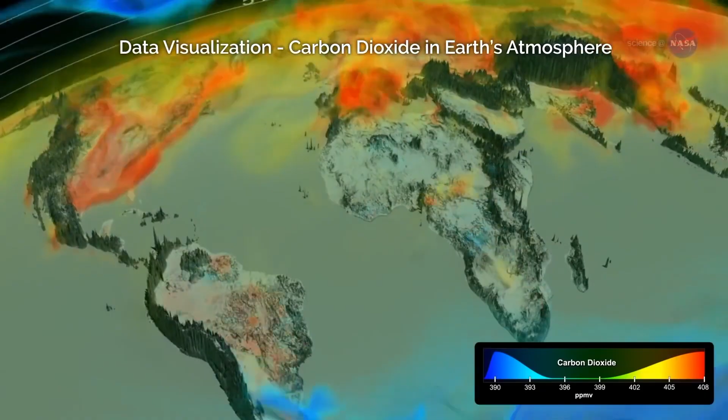We all know that the accumulation of CO2 is endangering our planet. For instance, we have recently reached the threshold of 400 ppm, entering the danger area, and if we do not act now, there will be catastrophic consequences.

But let's start with some facts about combustion, to show you the importance that combustion has. For instance, 2/3 of the world energy supply is based on combustion. So if you take a typical day in your life, that would have a certain energy footprint, most likely based on combustion. But on the other side, combustion is responsible for air pollution with NOx, SOx, soot, and CO2 emissions. So the first reflection would be we have to get rid of combustion, but that is not so easy.

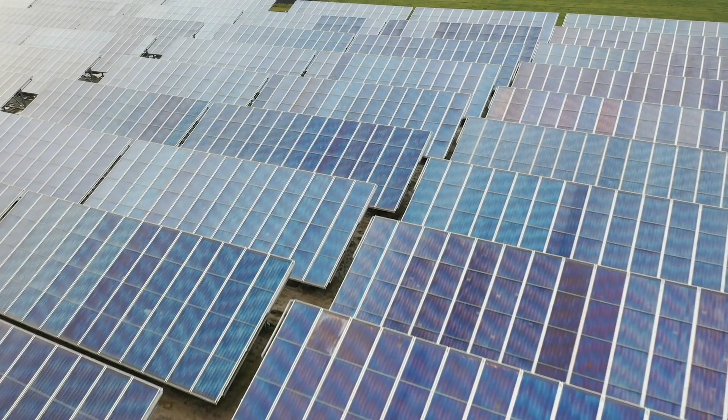Let's understand why together. The main issue related with renewable energies, solar and wind, is the low energy density and the intermittency, both in space because they are not evenly distributed in the world and in time because their input changes. So there will be a mismatch between energy production and consumption at different scales, day, month, year. So in a hypothetical world based on 100% renewables, we will need to store a gigantic quantity of energy.

But how to reach this storage level? Batteries cannot reach this high storage capacity. Therefore, we will need something else, something for seasonal storage with low pollutant emission and zero CO2 emissions. Chemical storage or power to fuel is a potential candidate. Indeed, it foresees the use of excess energy from renewables to produce energy carriers in the form of synthetic fuels.

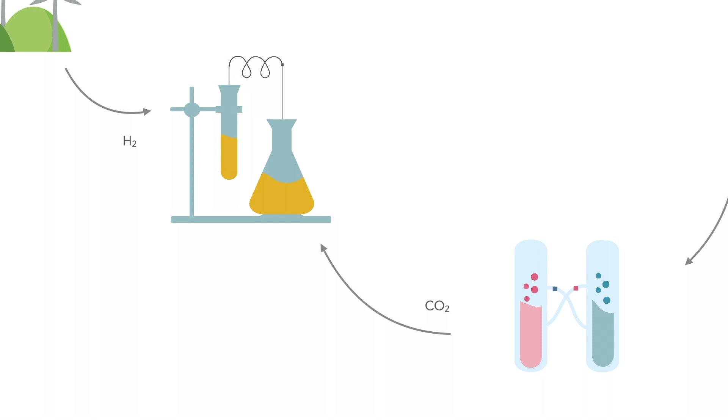We start from the electrolysis of water, we produce hydrogen, and then adding other molecules into the loop, for instance CO2 from carbon capture, we can produce methane, or nitrogen, and then we can produce ammonia. In this way, we transform the intermittency of renewables into an opportunity. Ammonia has a great advantage compared to hydrogen because it's liquid if compressed at 9 bar. So we can solve the transportation problem of hydrogen.

There are recent studies foreseeing the usage of ammonia for marine transportation, or hydrogen can also be plugged into the natural gas pipeline and can be used in a blend with natural gas. However, something very important that has to be considered is that even if hydrogen and ammonia are carbon-free, so no CO2 emissions, they still produce NOx, which are very dangerous for human health and can produce acid rains, so that should be avoided.

The main idea behind my project is that combustion is not the problem, because we still need it, but we need to develop combustion technologies which are fuel flexible to handle these new smart energy carriers, with low pollutant emission and high efficiency. Flameless combustion might achieve these goals.

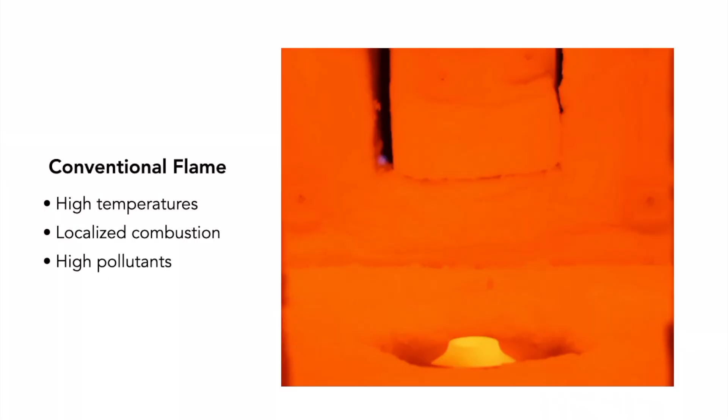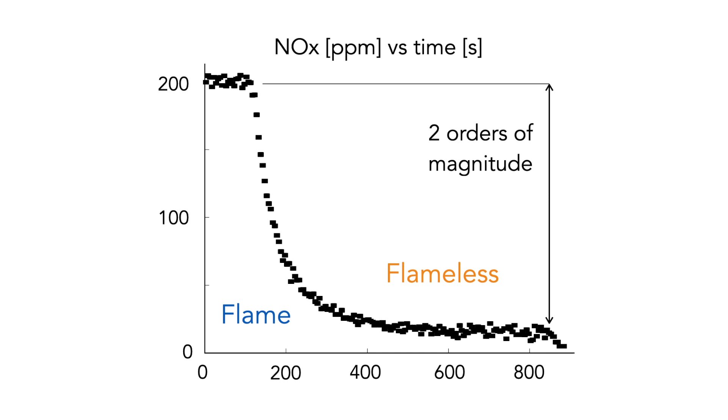Indeed, it is characterized by a strong mixing between fuel and air and flue gases, leading to a combustion region more spread into the volume of the combustion chamber, thus limiting the temperature peak and suppressing thermal NOx, so leading to very low pollutant emission. Flameless combustion was widely studied in the last years, but mainly for laboratory scale burners and with conventional fuels, methane and natural gas. The main goal of my thesis instead is to extend these limits, answering this simple question: is an industrial flameless burner capable of handling these new smart energy carriers with low pollutant emissions?

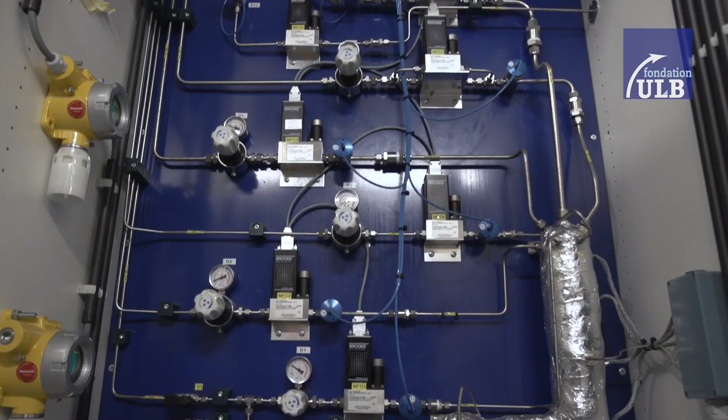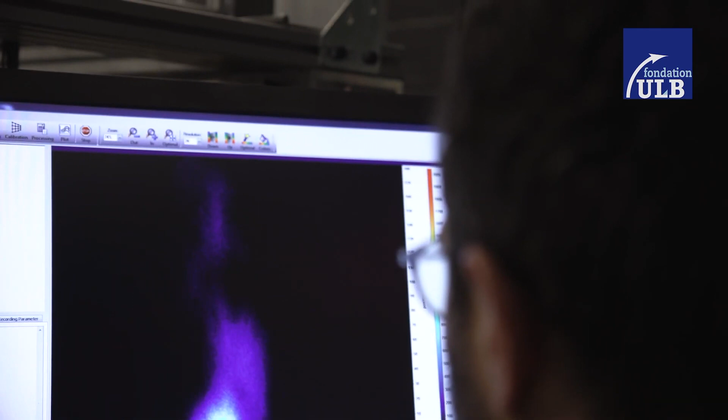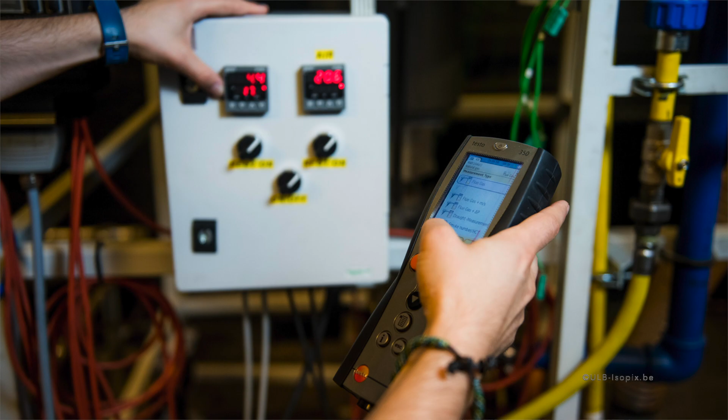During my thesis, I personally contributed in designing and installing a facility unique of its kind, made of an industrial flameless burner with a combustion chamber, a fuel mixing station where gases from pure bottles are mixed together to achieve the desired composition, and a measurement apparatus consisting of temperature probe, flue gas analysis, and optical measurement. I mainly focus on two families of smart energy carriers, methane-hydrogen and ammonia-hydrogen, leading to results unique of their kind, varying different operating parameters such as equivalence ratio, injection velocity, fuel composition, and input power.

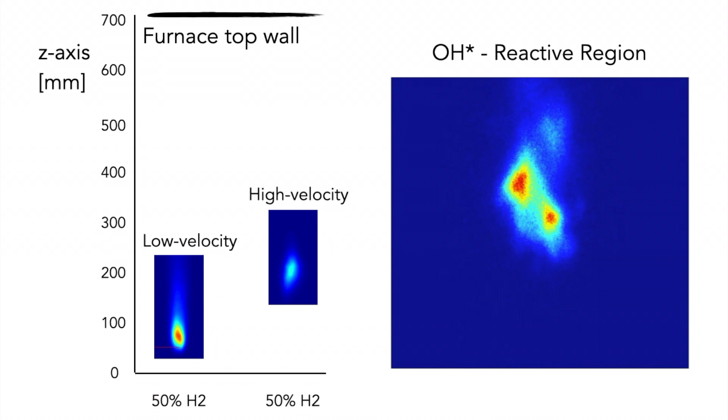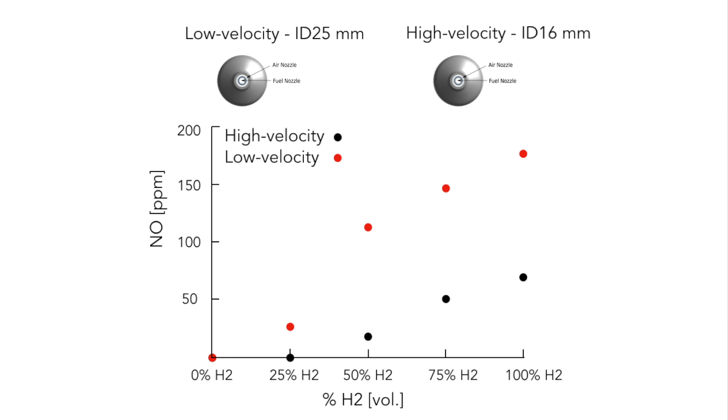The main takeaway message for methane-hydrogen is that injecting hydrogen into methane increases the reactivity of the system, leading to high temperature, high NOx emission, and losing flameless behavior for compositions of 20% hydrogen in volume. Different techniques were used to mitigate this issue, increasing the injection velocity, for instance, or increasing the length of the fuel injector, thus increasing the mixing of the system and the dilution level, restoring flameless combustion up to 70% of hydrogen in volume, and limiting NOx emission at values below 30 ppm.

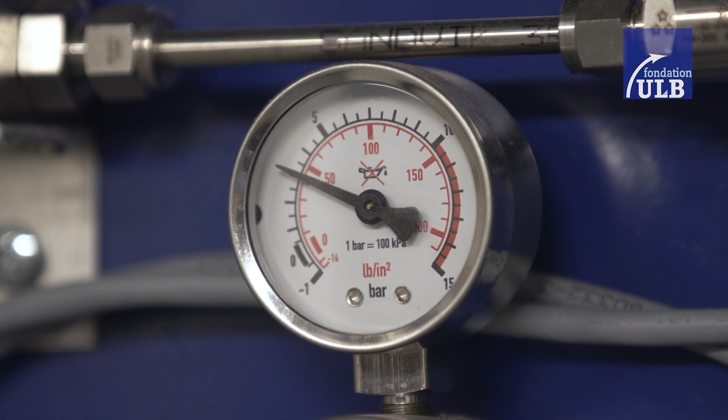For ammonia, having NOx is an intrinsic and inescapable issue, because it's part of the oxidation process. But a main goal of my thesis was to reduce these figures, and I achieved this target with a novel approach combining experiments, CFD simulations, and numerical modeling. This allowed me to study the effect of chemistry and fluid dynamics, underlining the most important reactions forming NOx, and once that was known, I came back to the experiments. For instance, I found out that for ammonia I need to reduce the injection velocity in order to enhance the so-called reburning reactions, namely the reactions converting NOx into nitrogen. Furthermore, it was found that the best operating scenario is a compromise between NOx emissions and ammonia slip, namely unburned ammonia, and this is achieved with very low air excess.

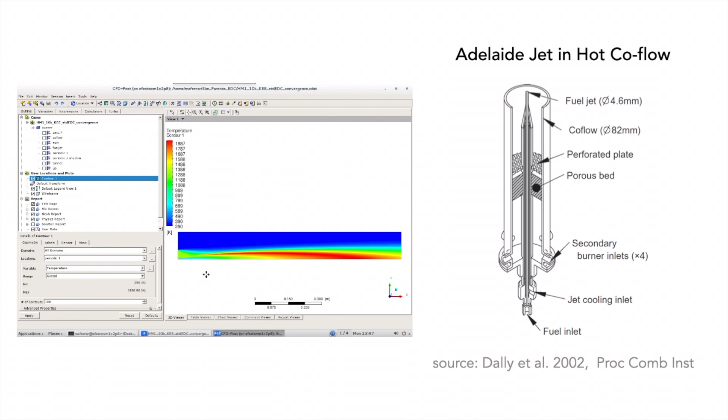The second part of my thesis focused on CFD simulations. Simulating flameless combustion is not easy because it involves different physics such as radiation, fluid dynamics, and chemistry, characterized by different time scales, and decoupling, especially for flameless, is not possible. For this reason, I optimized an existing combustion model implementing a C routine enhancing Fluent, testing different definitions of the main variables, some of them for the first time in literature. The resulting model was first tested in simple 2D burners, and then finally for the simulation of the flameless burner, providing a reliable tool for 3D simulations of industrial combustion applications.

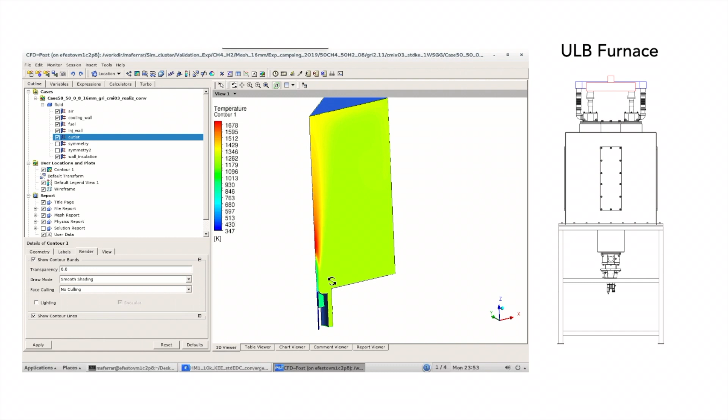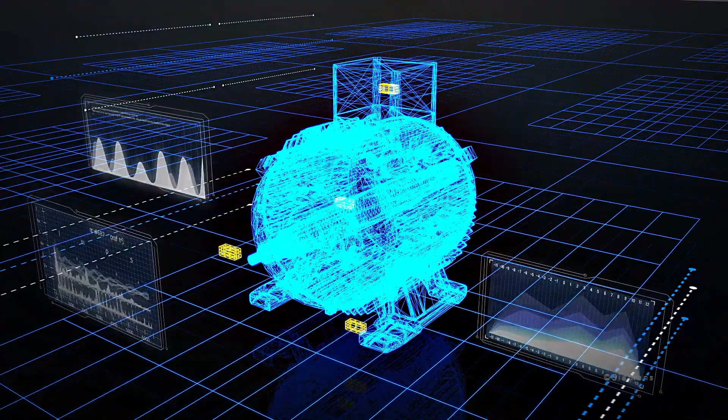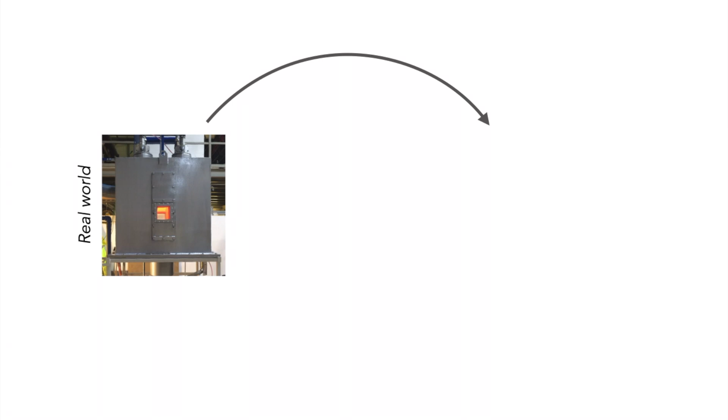Digital twins are becoming an intrinsic part of the so-called Industry 4.0, representing a bridge between the physical and the digital world. This opens up a number of opportunities, such as the use of data to anticipate the answer of a system, to brainstorm malfunctioning, or to anticipate a failure, and the main advantage is the response time, a matter of seconds. Another goal of my thesis was to build the first of its kind digital twin of a flameless furnace starting from CFD simulations.

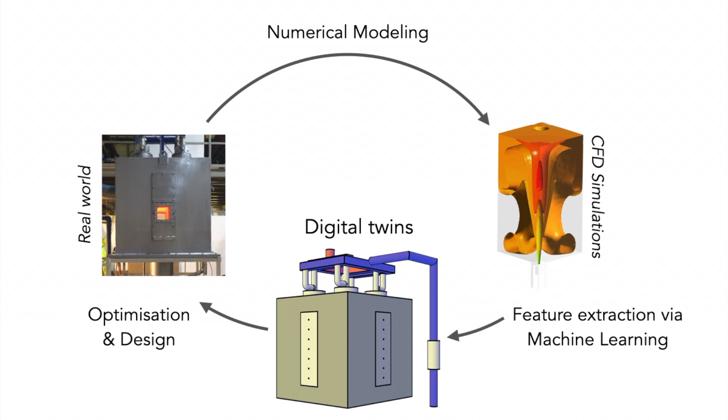Different parameters were varied: the equivalence ratio, the injector geometry, and the fuel composition, leading to 45 simulations. Part of them was used to build the model and part for its validation. This approach gave very impressive results with errors below 10% between the results of the CFD simulation and those of the digital twin. Once this approach was validated, now it can be used for other industrial applications.